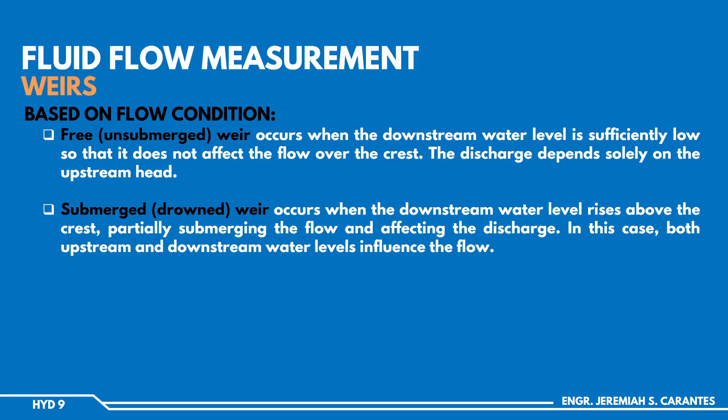For the rectangular weir, our formula for the discharge considers the velocity approach. When we say velocity approach, let's go back to the figure — it's basically the velocity of the liquid while it's still approaching our weir.

To take note, the velocity or flow of our liquids mainly relies on our head causing the flow. So in this part, this is where the drawdown starts. The drawdown will start to curve downward at our water surface, since it's flowing toward the other side. So this is what we call drawdown, the difference in the original water surface compared to the curved-down part, since it's flowing toward our weir.

So the velocity approach, basically we consider the velocity of the fluid as it approaches the weir. By the way, this head above the crest, when we add the crest height, this height is called the head upstream, or head causing the flow, or depth of the liquid upstream of the weir.

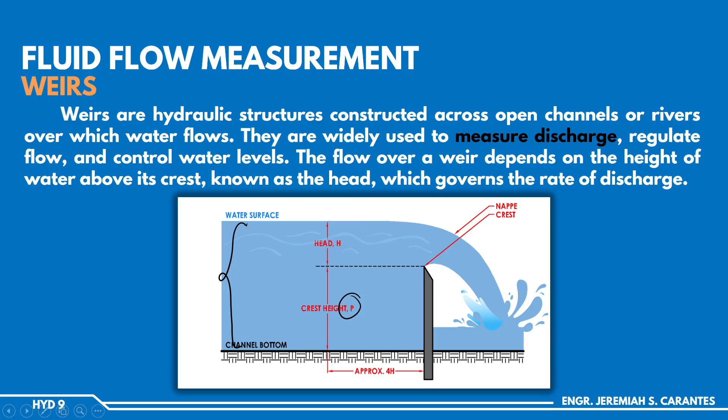Going back, our formula considering velocity approach is 2/3 C square root of 2G L, times the quantity H plus VA squared over 2G raised to 3/2, minus VA squared over 2G raised to 3/2. So what we're referring to as velocity approach is this V sub A.

That V sub A can be computed using Q equals AV. So the Q is what's being asked. The area of flow here is basically the area of flow before the fluid reaches or arrives at the location of our weir.

Now, if we neglect the velocity approach, these two terms will be removed. So what remains inside our bracket is just the H raised to 3/2. This is the simplified version if we neglect the velocity approach.

Take note that L is the width of our rectangular weir. The P is the crest height, from the channel bottom up to the very top of our weir. And the H is always measured from the crest, up to wherever our water surface is.

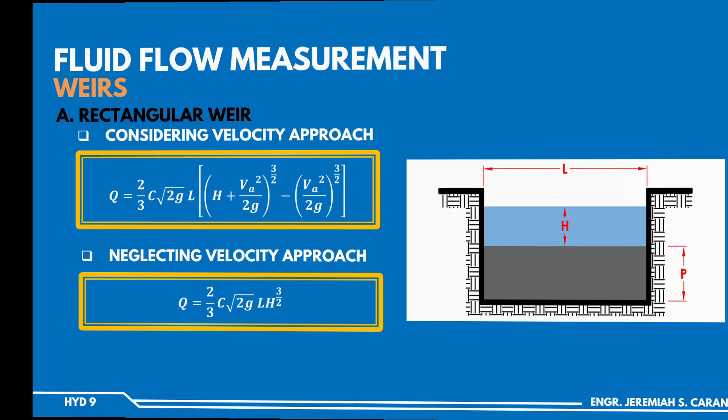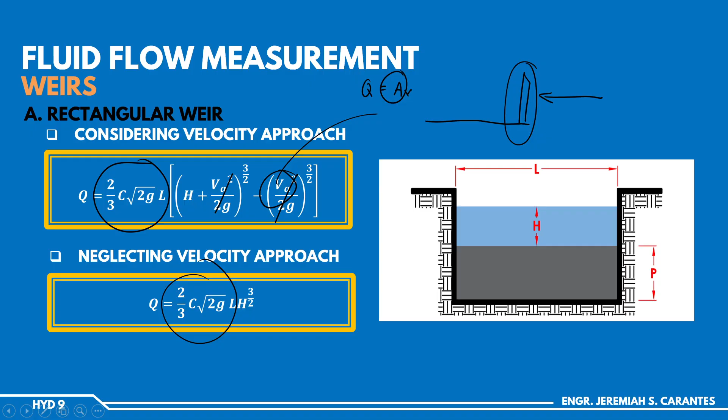So it is common practice to combine 2/3 C square root of 2G into a single coefficient, CW. This CW is called the weir factor. So the general formula for discharge of a rectangular weir considering velocity approach becomes the same as the previous slide, it's just that we replace 2/3 C square root of 2G with CW.

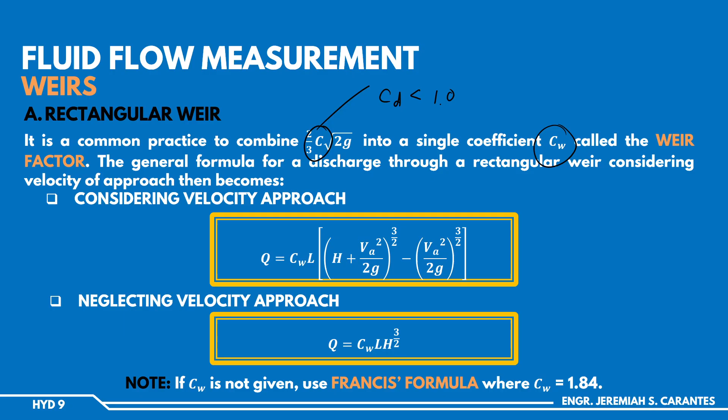So take note, kapag contracted, dito sa dalawang formula na to, even yung previous slide pa, yung L dito, papalitan lang natin ng L prime if contracted siya. Okay?

Now, for the different value ng ating weir factor, so ito yon. So, for the general value ng weir factor, ito yung normal na in-express talaga in terms of CW, yung 2/3 square root of 2g. So, ito yung Francis formula, Rehbock and Chow, and other types of weir. Etong dalawang ito, kay sharp-crested and broad-crested, hindi sila CW. So, they are just coefficient of discharge.

So, dito naman, ang kailangan mo to determine the value ng C is the head and then the crest height. So, si crest height from the bottom of the channel to the top ng weir natin. So, yun yung P. So, check nyo na lang, recall the previous slides natin. Okay?

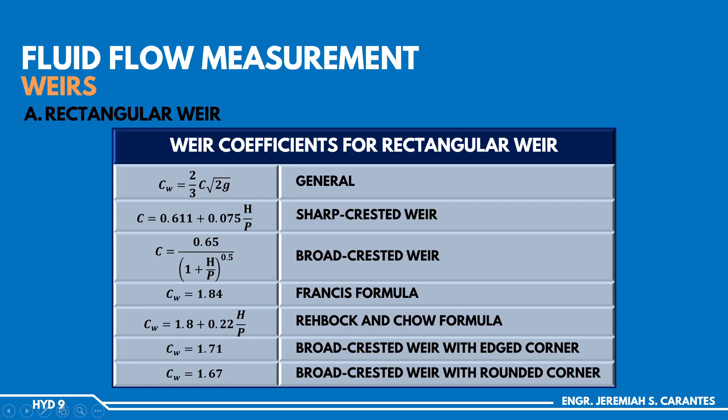For the next type of weir, we have triangular. So, triangular, ito naman ang formula ng kanyang discharge, 8/15 C square root of 2g tangent theta over 2 H raised to 5/2. So, basically, walang L dun sa ating formula. Ang kailangan lang natin is the height. So, yung L kasi, depende kung gaano siya kataas, so it will vary.

So, the value of L varies depending kung gaano man kalaki yung H natin. So, kaya ginawa na lang yung L, in-express natin in terms of H. Kaya 5/2 yun nandito. And actually, sa lahat ng klase ng weir, si triangular lang ang raised to 5/2. So, majority of them uses H raised to 3/2 sa mga formula nila. Okay? So, the theta dito is basically the vertex angle ng ating triangular weir.

So, that's the original formula ng discharge. And if you use the weir factor, dito naman ang ginagamitan ng weir factor is etong buong term na to. So, kanina 2/3, ngayon 8/15. Pero ini-express pa rin siya in terms of CW. And for the common type ng isang triangular weir, we have the 90 degree.

So, pag sinabing 90 degree, dito sa ating figure, dapat perpendicular yung dalawang side. And kapag ganun yung case, madali na lang ang formula natin. Ang kailangan mo na lang basically is the H. So, that's Q is equal to 1.4 H raised to 5/2.

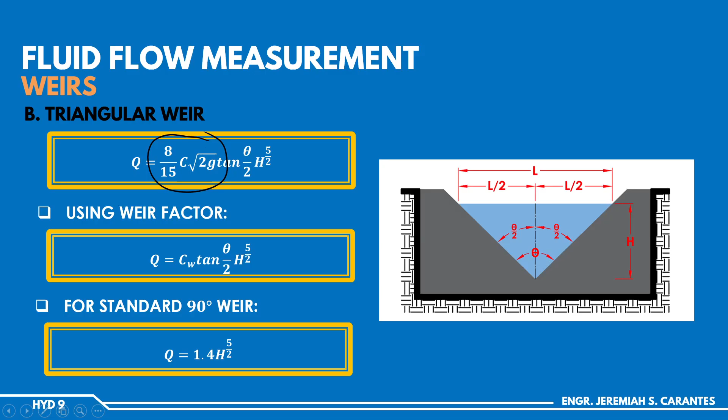Okay, next one, we have the trapezoidal weir. So, si trapezoidal weir, actually, huwag kayong masyadong matakot kung ito man yung lumabas. Basically, di ba, first type, rectangular, second type, triangular. So, pagsamahin lang natin yung formula nila. Kasi dito, etong gitna, that's a rectangle part. Tapos, etong gilid na dalawa, pag pinagdikit nyo yan, kamukha din naman nung triangle weir natin.

So, yung formula niya, basically, this first term is for the rectangle, while this second term galing siya kay triangle. So, pinag-add lang natin. Kasi by principle, pwede mo namang i-isolate yung rectangle tapos pagtabihin mo yung dalawang kalahating triangle to get the discharge. So, that's for the trapezoidal weir.

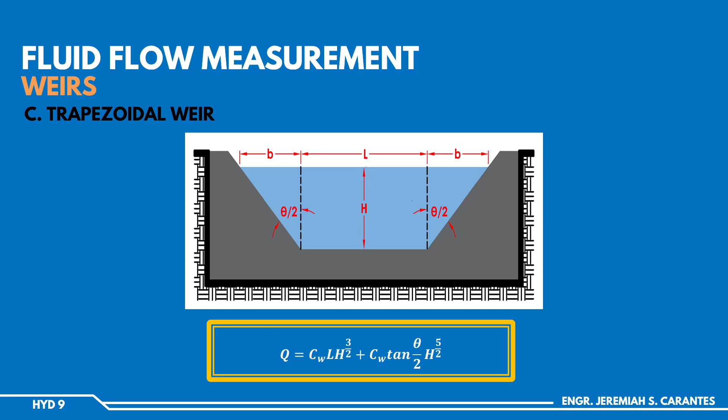Now, in some cases, minsan babanggitin na lang ano yung angle from the horizontal ng isang trapezoidal weir. Minsan hindi babanggitin na 4 vertical, 1 horizontal siya. So, you need to recall anong value ng angle theta from the horizontal in case of a Cipolletti weir. So, to get that, tangent theta is equal to vertical over horizontal.